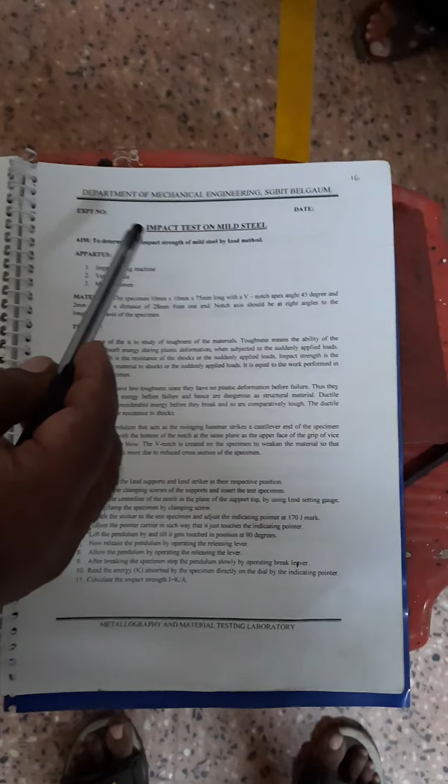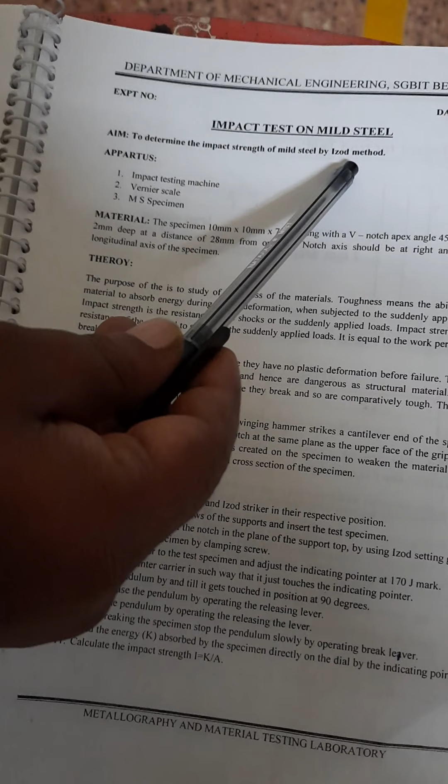Good morning, students. So again, we are going to conduct the impact test on the mild steel. So what is the aim today? We are going to determine the impact strength of the mild steel by the Izod method. Last time we conducted the Charpy, and now we are going to conduct the Izod method.

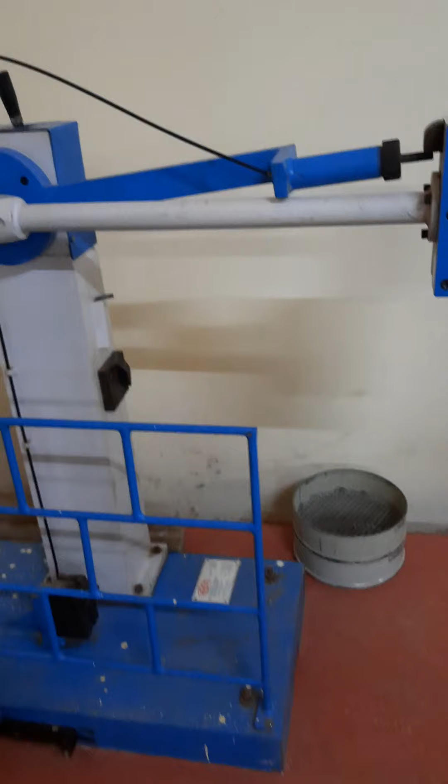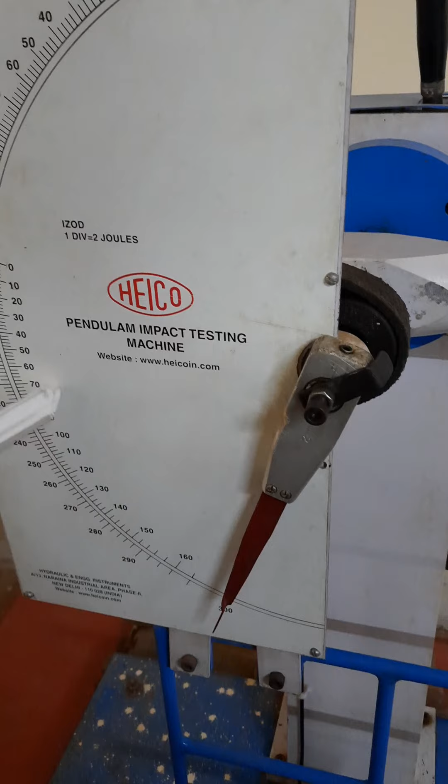Okay, so let us discuss the experiment setup. In a similar way, here we can see the Charpy. The Charpy we have conducted previously, and now we are going to conduct the Izod. The readings will be like this: the same readings for Izod and Charpy, that is 1 division equals 2 joules. We are going to find how much of the energy is going to be absorbed by the test specimen.

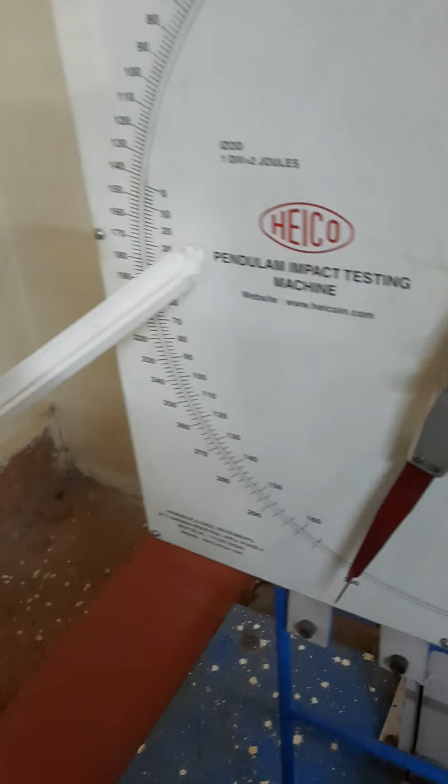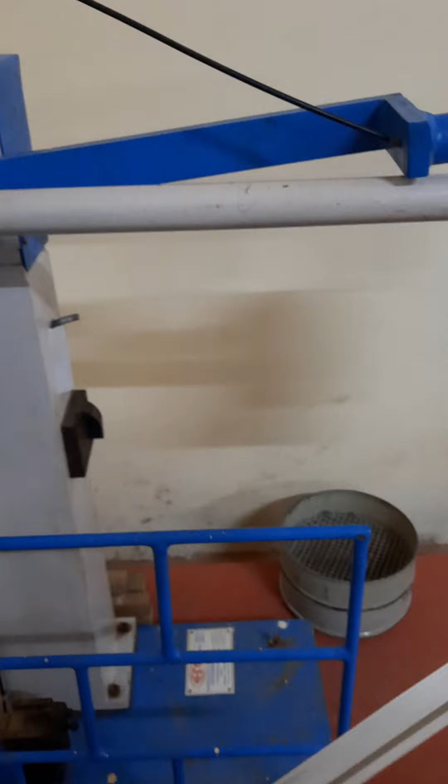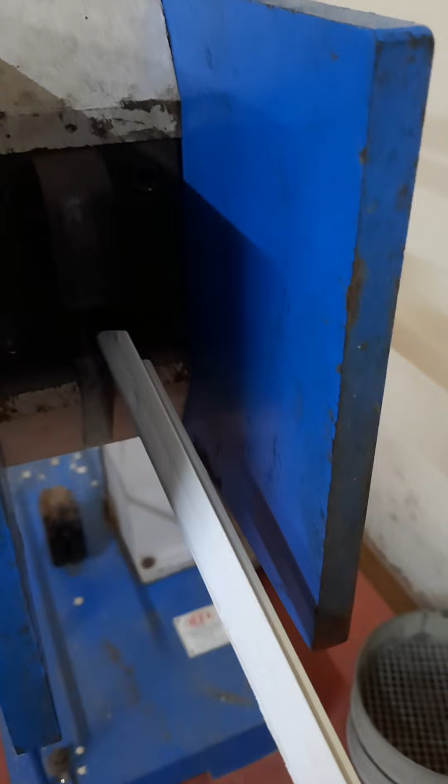We initially place the test specimen here. How much energy is absorbed will be indicated on this marking. The apparatus consists of the scale marking, and then we have the hammer here. This is where the hammer is going to hit the material. It is going to be changed for the Izod and the Charpy, like the cutter; it changes for both the Charpy and the Izod. Now we are conducting the Izod test, and we have to use this specimen for the hammer.

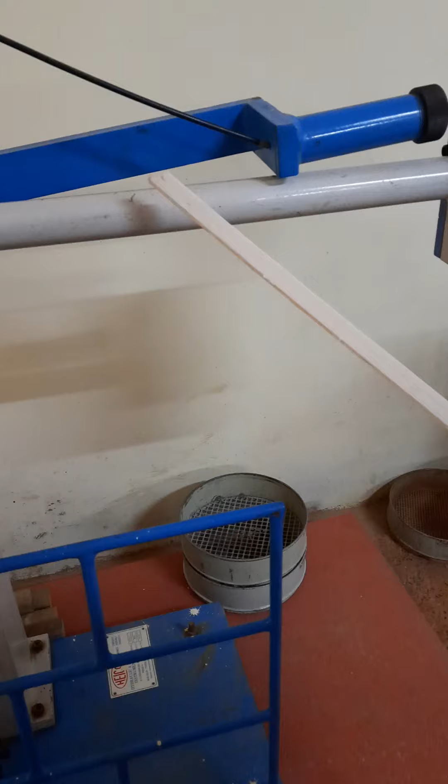So you can see here, this is the hammer. Now it has been locked by using the locker. Once it has been opened, we press here, and the hammer will hit the material. Here you can see the material has been clamped. Then there is a notch provided here, similar to the Charpy test, a 45-degree notch, and that notch should be at the same reference with the clamp. You can see the dimension here. We are going to place it vertically, and here the notch has been provided.

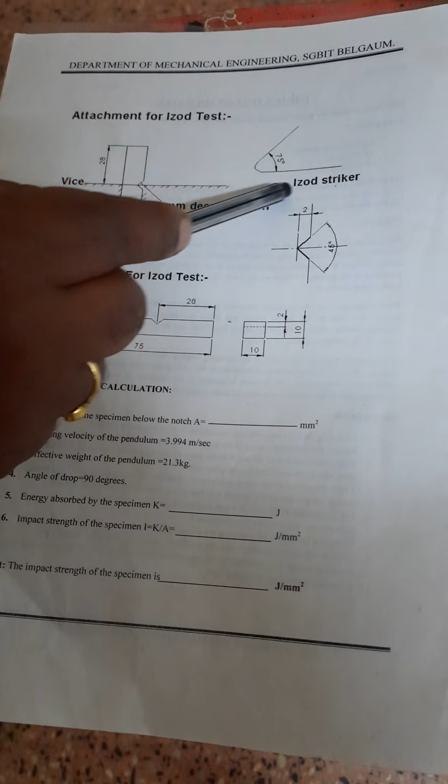The notch is provided, 28 mm, and this is the striker. The Izod striker gives an angle of 75 degrees where it hits and causes failure of the material. You can see the length is 75 mm, the cross-sectional area is 10 into 10, and we have a 2 mm notch. The depth of notch is 2 mm, and the cross-sectional area of the specimen below the notch, A, is 8 into 10 mm square.

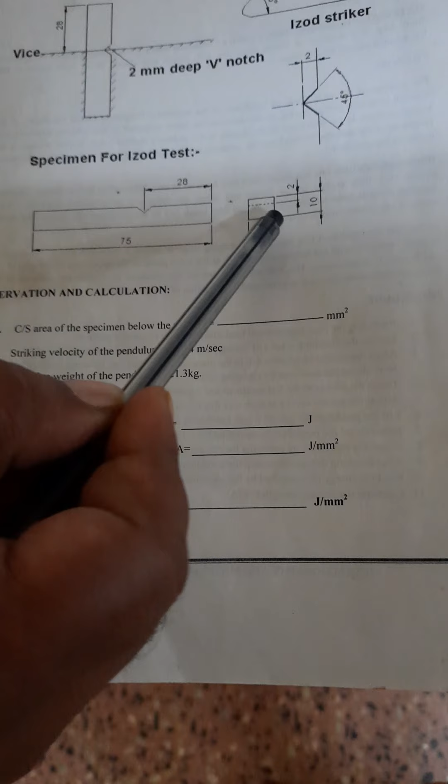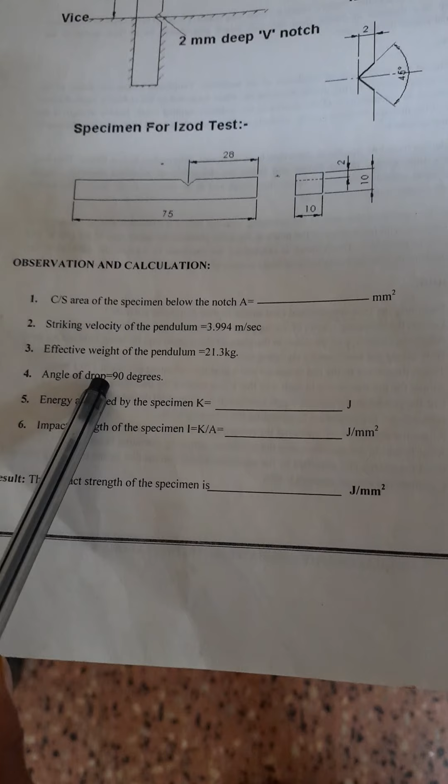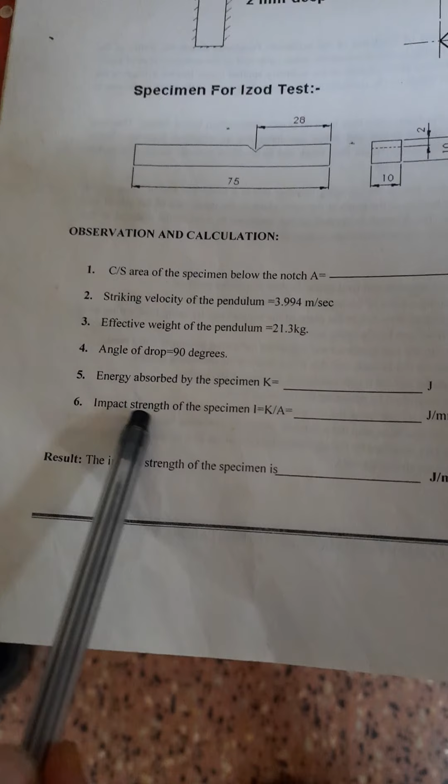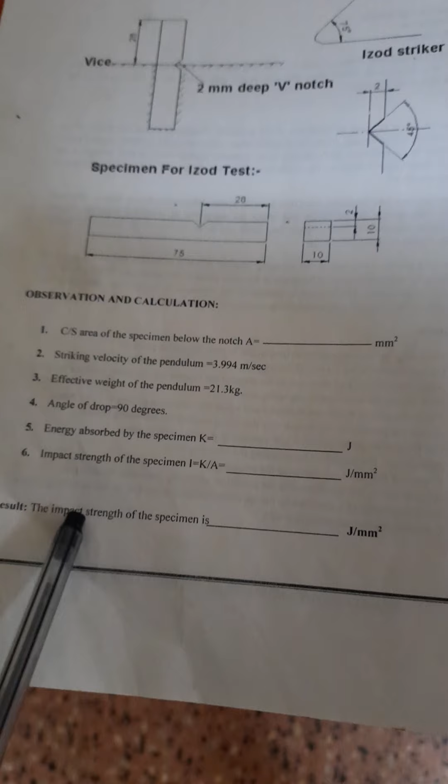Next, the striking velocity is around 3.99 meters per second. The effective weight of the pendulum is 21.3 kg, and the angle of drop, the angle at which we drop the hammer, is 90 degrees. The energy absorbed by the specimen, K, is obtained from the scale. Finally we calculate the impact strength, I equals K by A, where K is the energy absorbed and A is the cross-sectional area of the specimen, giving the impact strength by the Izod test.

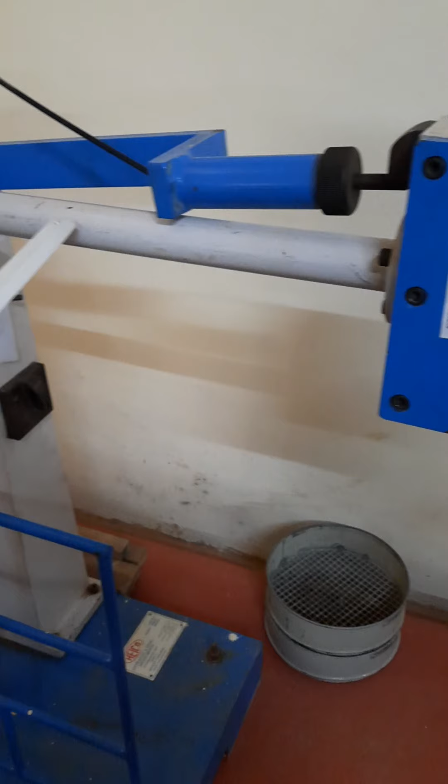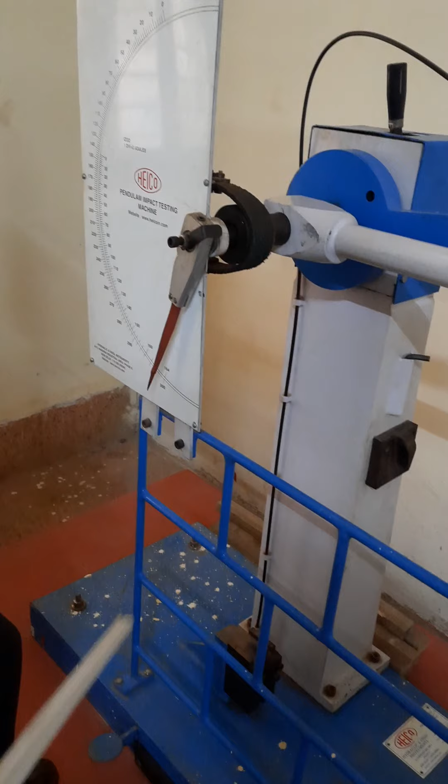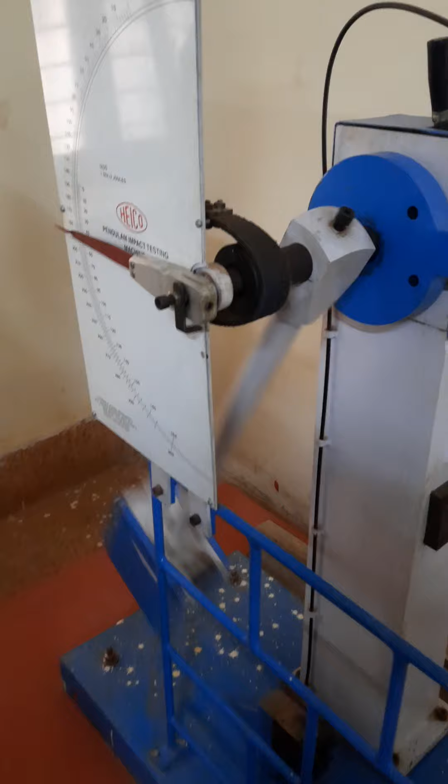So now you can see here, the brake is going to be released, and suddenly the hammer starts its motion. The hammer swings and hits the material, and based on that we take the readings. Now you can see here, we start the swing of the hammer. It hit the material, and the material has been cut. Zoom out. You can see how the material has been broken.

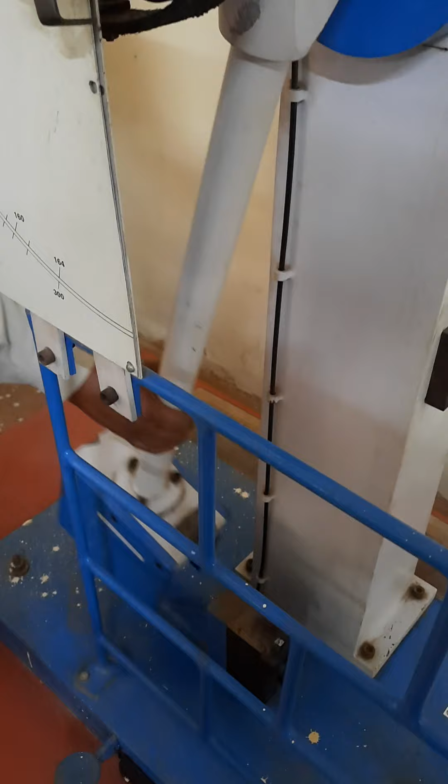Now it is going to stop the hammer, and now you can see the reading here. So how much is the reading? The pointer reading is on the 40 mark. So that is 40 into 2, which is 80 joules of energy absorbed by the material in the Izod test.

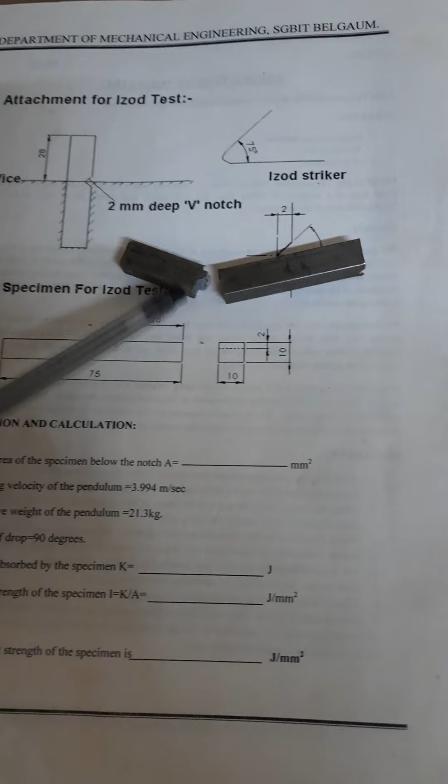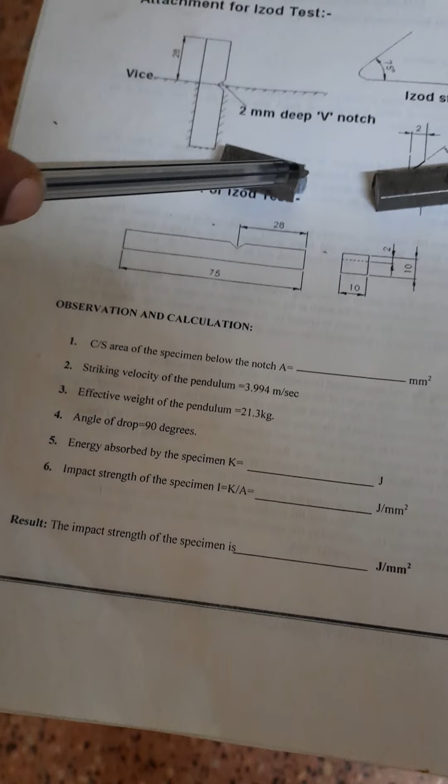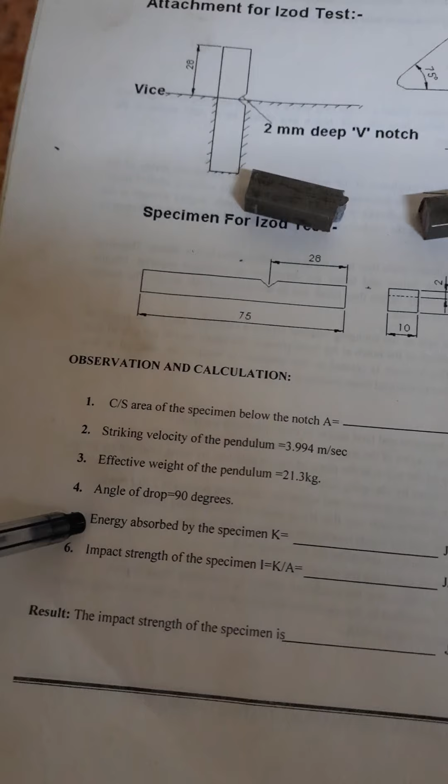Now you can see the material has been broken. This mild steel specimen has broken, and the energy it absorbed is 40, meaning 80 joules. The total length is 75, and it has broken at the notch. The cross-sectional area is 8 into 10. Then the standard readings: striking velocity, effective weight of the pendulum, and angle of drop, 90 degrees with the horizontal, and the energy absorbed, K, is 40 into 2, which is 80 joules.

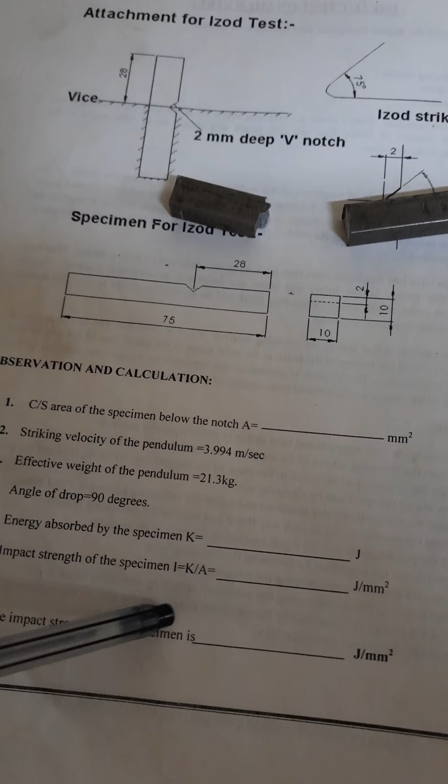So based on that, I equals K by A. K will be 80 and A will be 10 into 8 mm square. Finally we get the value of the impact strength of the specimen. So this is how we conduct the experiment to find the impact strength using the Izod test.